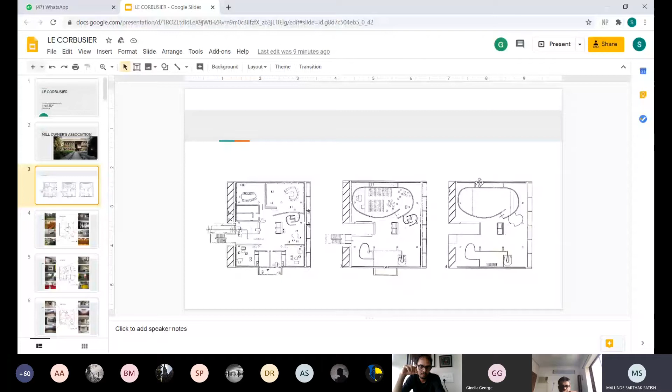Like in the third plan, you see this is the auditorium, and I'll show you the pictures ahead. So this is the ground floor plan. The ground floor is lifted on stilts with very minimal spaces, and the glass on the first floor and the rest above.

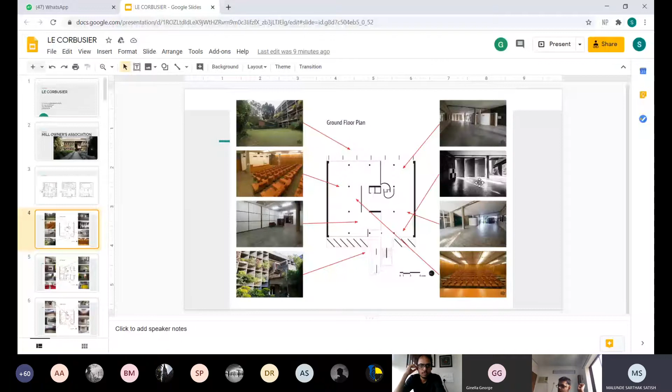Yeah, so these are the photos from when it was built, early on, the photos that were clicked at that time.

So this is the door at the second floor where this ramp takes you and then the staircase takes you. What I like here is that this door is acting, for me, as a perfect threshold between inside and outside. The way he has played with the solid forms and the voids here, I really like it.

And he usually creates such huge openings like the door here. He usually has square doors which are mainly hand painted by himself.

So the staircases at the Millowners are very extraordinary to me because they are a combination of aesthetics and engineering. In the staircase there is the beam which is coming from the column, and it is taking the load, in both the staircases in the center and the left side.

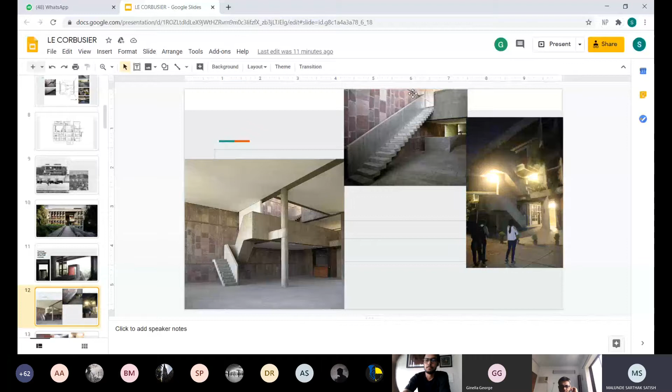The handrail is also very appropriately arranged, and in fact in the central staircase it is the beam which is acting as a handrail, which is quite a good combination of aesthetics and engineering. And this third photo is from one of our seniors who had sneaked into Millowners and took these photos for us.

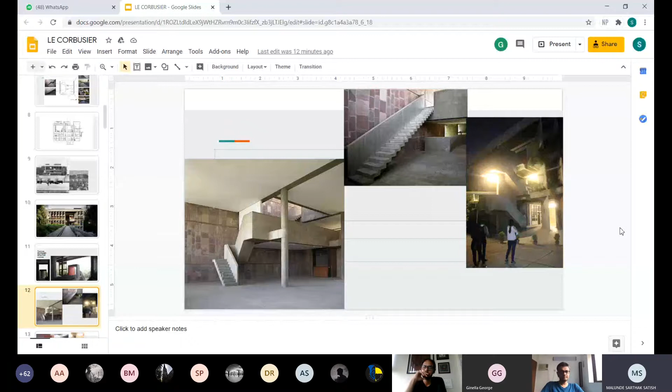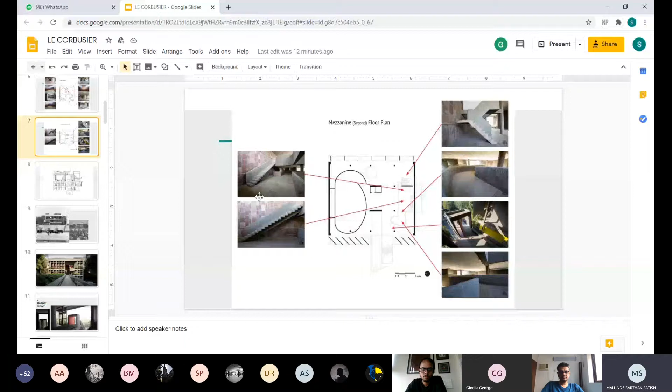And this is the auditorium which I talked about in this slide. These curved walls engulf the space, and the walls have a wooden finish, and it's a very good space.

These are some of the photos from Millowners where you can see the columns from the free plan, and these he called brise-soleils, which were a modern kind of chajjas which prevented light from entering the building, but also acted as frames for the viewers. And there were also places where you could place vegetation.

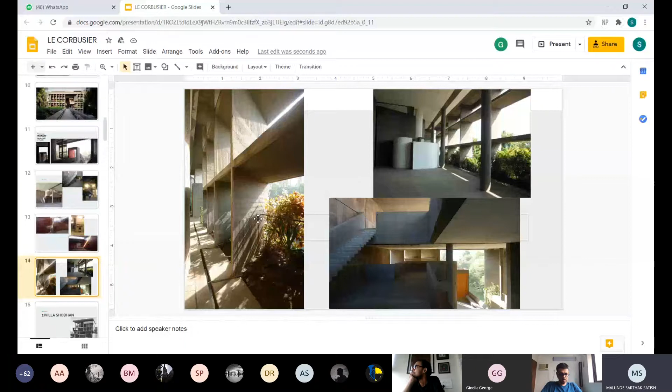Yeah, and this is what he used in many of his buildings in India. This was one of his concepts. And yeah, so now it's Villa Shodhan.

Gargi, would you like to take it over from here, or should I show the... No, Ronchamp first and then? Yeah, yeah, works like that also. Okay, cool.

Okay, so this is Ronchamp in France. This is a chapel which is located on the top of a hill. This is a conceptual drawing of Le Corbusier, and he wanted to create a space which would make one feel inner joy, have peace, and where one can pray.

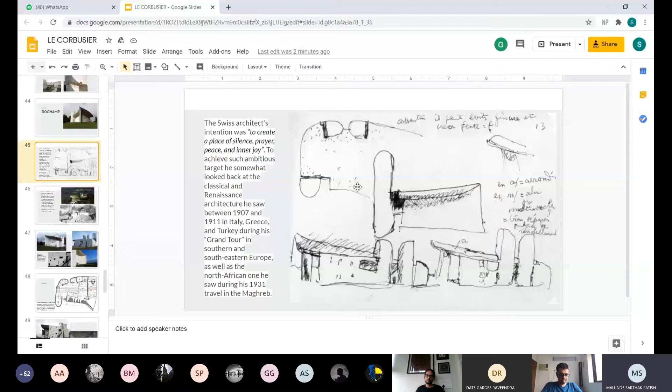And this is a sketch of Le Corbusier from when he was on his grand tour, exploring and studying architecture from different realms of history. And so this chapel is also considered one of the monumental structures sitting on top of a hill, just like the Parthenon and Acropolis.

So the materiality and the texture used in this structure is very different from the rest of his projects. Here he has used a much more organic form, and the texture is sprayed concrete over the walls. This way of materiality helps the structure to be one with the landscape. Like the way the light falls on the edge.

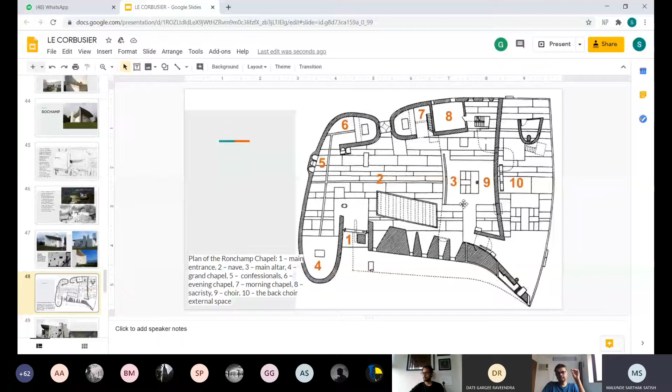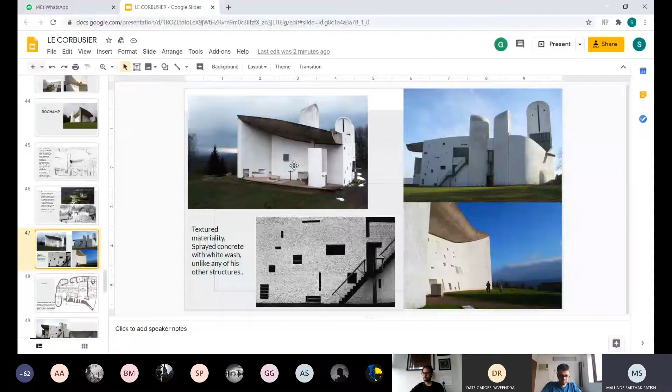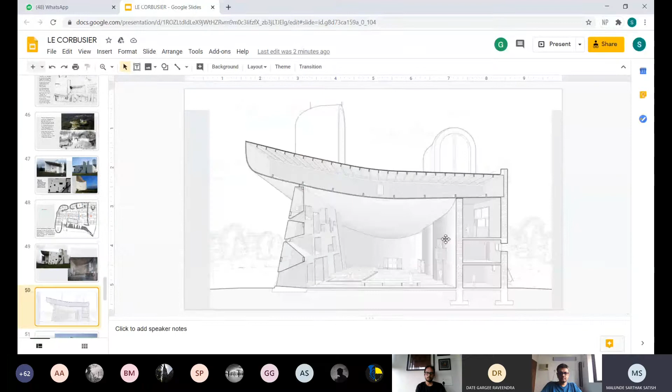Yeah, so the roof of Ronchamp is very extraordinary. Can you see the white... the roof seems floating because it is not coming in contact with the heavy walls underneath. There is a thin sliver line which is seen from the inside, and this is the section for Ronchamp. The roof is fully reinforced concrete, 6 centimeters thick, and so the roof is

often conceptualized; there are many theories behind it. Some say that it looks like a hand, some say it looks like a cloud. But what I interestingly read about it is that Le Corbusier was inspired by an empty crab shell he found on Long Island.

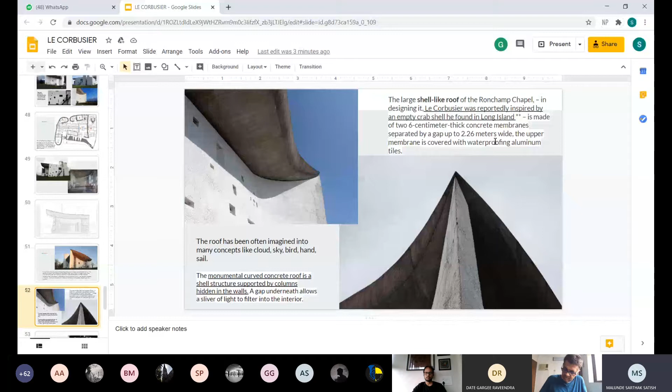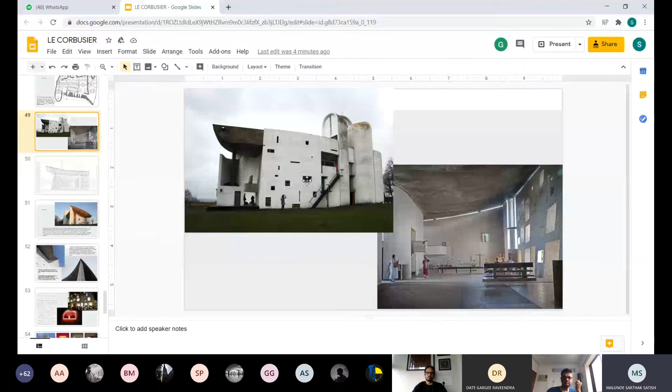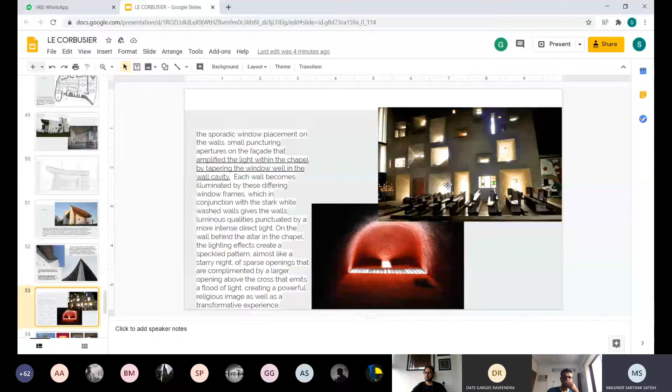So yeah, and these are the fenestrations which are there in the chapel. If you see these fenestrations, they look very small from the outside, but they are very cleverly crafted in such a way that there is maximum light inside, and the glass present here is hand painted by Le Corbusier. And yeah, these are some of the glasses, and the details I really liked.

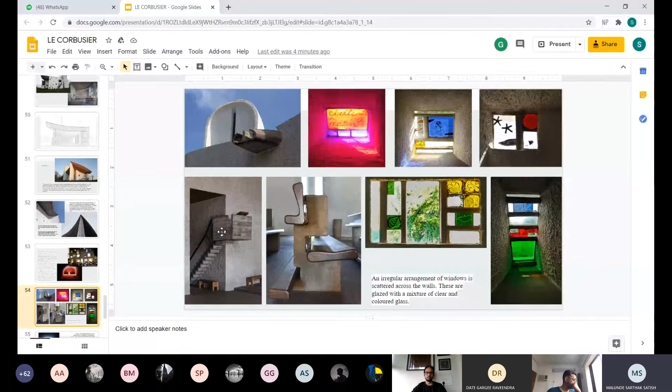So even the benches in the chapel are a combination of wood and concrete, which are designed very cleverly, and the staircases as usual are of raw concrete. Yeah, this is the main chapel.

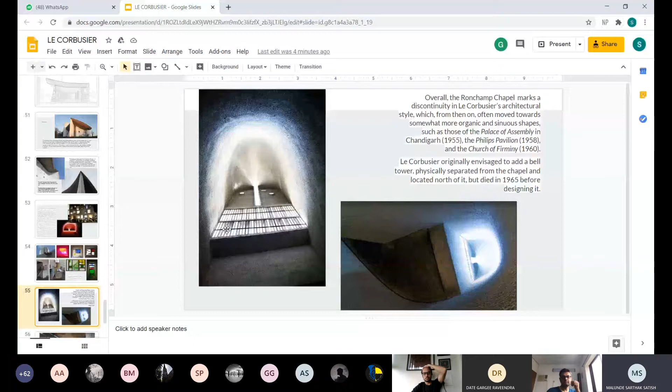I don't know, they wanted to create something which would feel peaceful, but many things are happening in this chapel. At least from the photos, it looks like many things are going on, and I don't know if one would feel at peace. I guess we can't say anything unless we go, but at least from the photos, I feel that there are many things going on at a time. There is a fantastic composition of all these things, but I don't know if it is successful in creating that peaceful ambience in the interiors. Yeah, I'm done here.

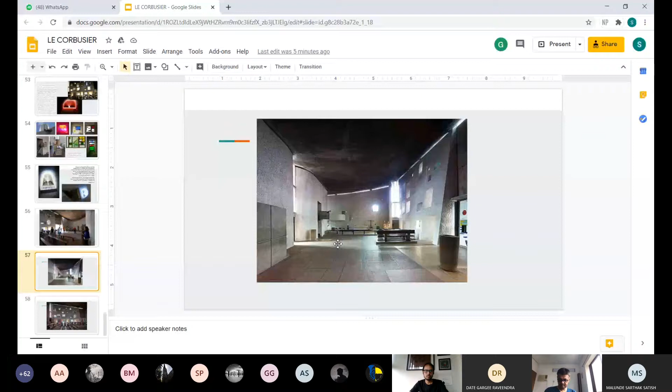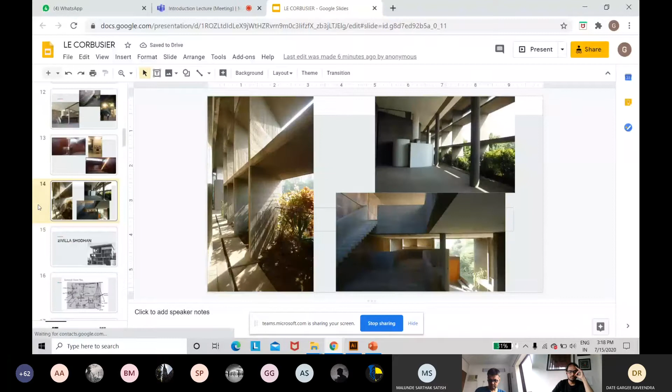Sarthak, yeah, will Gargee, can you take over? Stop? Yeah. Oh, okay, okay. Okay. Yes. Yeah, can you see my screen? Hello. Yes, yes, we can see.

Yeah, so talking about Villa Shodhan, it is located in Ahmedabad, Gujarat. It was designed for a warmer climate and an extroverted client. Villa Shodhan is a story of a roof parasol. A roof parasol is basically a shading device used in a hot and dry climate where shade is essential during the daytime and the outdoors is pleasant in the evening. So the house is composed to kinetically balance the solids with the voids, a dynamic sculpture that keeps changing with the position of the sun through mutual shading.

Villa Shodhan is also known as an update of Villa Savoye. In Villa Shodhan, one could notice that it comprises several themes of Le Corbusier's earlier work, and it's a synthesis of his previous ideas, just played at a higher pitch. So, looking at the ground floor plan, wait, 1 second.

Yeah. So basically, you enter the Shodhan Villa through the northwest entry. You enter from here, then you have a blank wall here, and then there is a void here which takes you in. This is a porch which is cantilevered. As you enter, it takes you into the space which is defined by walls and freestanding ramps.

This ramp, which is transversely placed, is placed in such a way that the living room and the dining room get their privacy; that's the reason for placing the ramp exactly here. And the bottleneck created here at the confluence of horizontal and vertical circulation, at the commencement of the ramp, further marks the threshold; it acts as a threshold for the living room and the dining room.

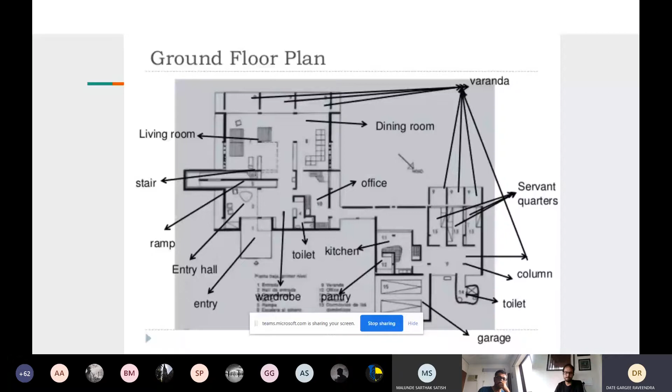And the living and the dining rooms, they also extend naturally into the gardens which are there. So the ground floor is double heighted. And then when you come to the second floor, it is basically simple with just bedrooms and open terraces.

The third floor has living spaces composed with a variety of open and closed spaces. There's a ramp which takes you from the ground floor to the third floor, and meets the stairway to the top of the main living room. So the upper floors, that is the second and the third floor, generally contain only sleeping areas, and the ramp actually acts as a device for smooth transition and gradual climb.

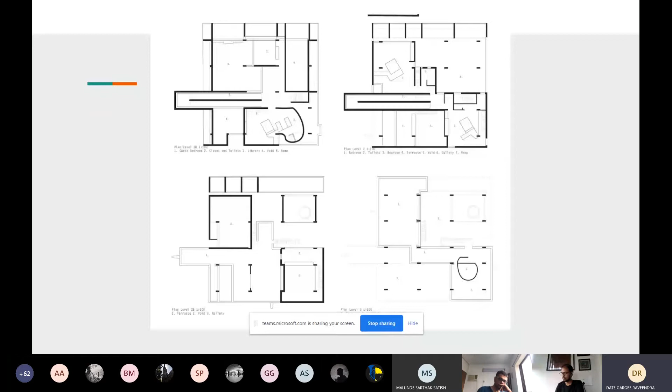So in this section, basically what you could say is, you have these ramps, then you have staircases at different levels. Through this one could also notice that there is an interplay of closed and semi-closed spaces, low and high volumes, spatial variety, and visual continuity.

So this roof which you can see here, that is the roof parasol. The roof parasol is supported by 4 columns that run from the ground floor to the top of the roof. That is a speciality of Villa Shodhan. Basically, a parasol means an umbrella which protects you from the sun.

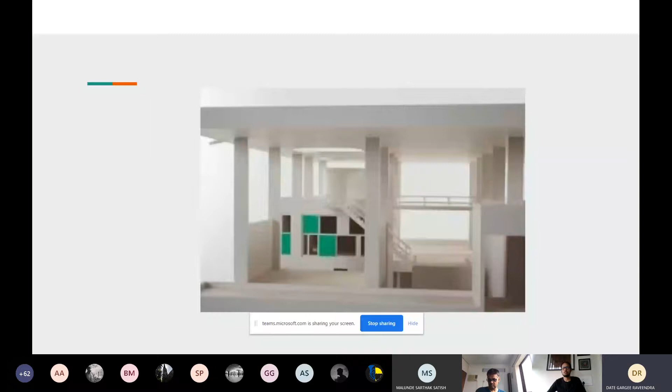Then talking about the brise-soleil, it is basically a screen which is usually louvred, placed outside the main building to protect the building and the windows from the sunlight. So Villa Shodhan emerged as an update of the Villa Savoye, and what one could see through these were the parasol roof and the connectivity, that is the ramps and the staircases,

which can be seen from the exterior through these brise-soleils. The brise-soleils are present on the southwest, so that they provide the much needed shade from the haze and heat of the sun, while keeping it transparent for the breeze, as well as giving you views of the outdoors.

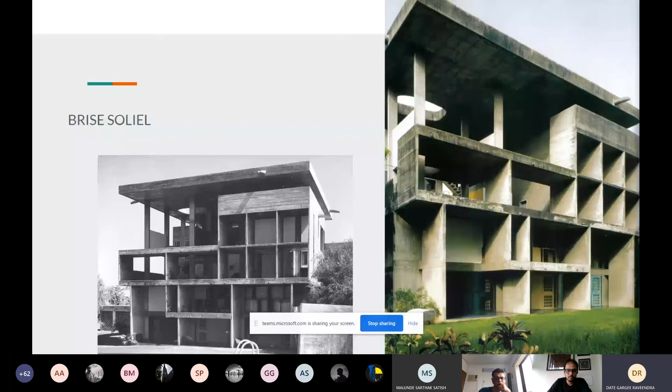So here Corbusier also tried to incorporate elements from the local architecture. The living room of the ground floor is double storied over here, and that was a characteristic which he found present in the houses he looked around. And also he lets nature into the house, which was again a characteristic he found to be common there.

One more thing which was very prominent in Villa Shodhan was the brightness of colors, used against the neutral, concrete, monotonous backdrop. So basically, he used colored doors and window frames. And in Villa Shodhan you have a freestanding roof, but such a bulky mass is anchored to the ground.

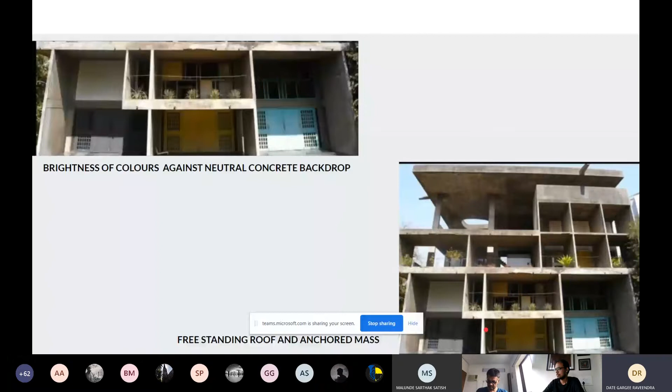And also, Villa Shodhan is based on Corbusier's 5 principles: you have these horizontal windows over here, then you have the free floor plans as in many of his buildings, then you have these roof gardens which you can see here, then you have these pilotis, which were again a major thing of Corbusier's architecture, and then you can see the free facade over here.

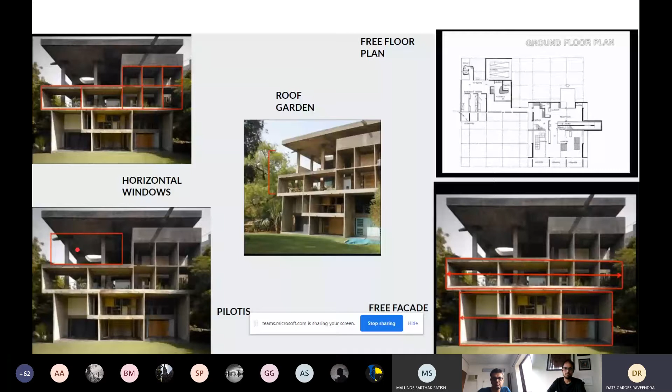So talking about the next structure, that is La Tourette. La Tourette is located in France. It is Corb's final building completed in Europe and is also thought by many to be his most unique program. It was built to be a self-contained world for a community of silent monks.

Father Couturier told him that the building had to show poverty, which was one of the main principles of the Dominican order, and it had to accommodate the unique and specific study lifestyle of monks. So it had to be an appropriate place where the monks could study, with a comfortable temperature and silence. The site was specifically chosen, as Corbusier was drawn towards the steeply sloping banks with powerful views.

The structure is basically RCC with undulating glass. The monastery is composed of 4 rectangular structures, with one which acts as a church, and the other 3 housing the cells for the monks, the libraries, the refectory, a hall, and such things. So basically, when you look from the road, you can only see these cells, and this is the church.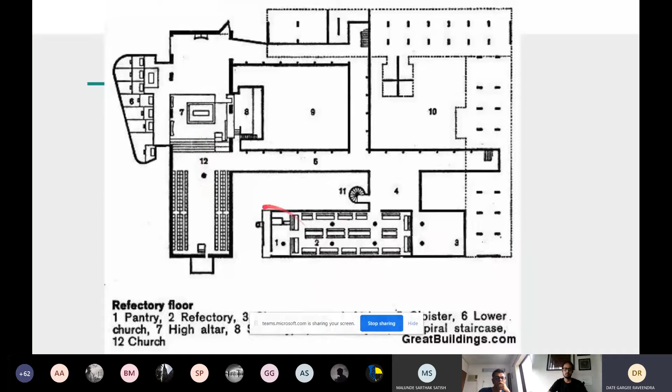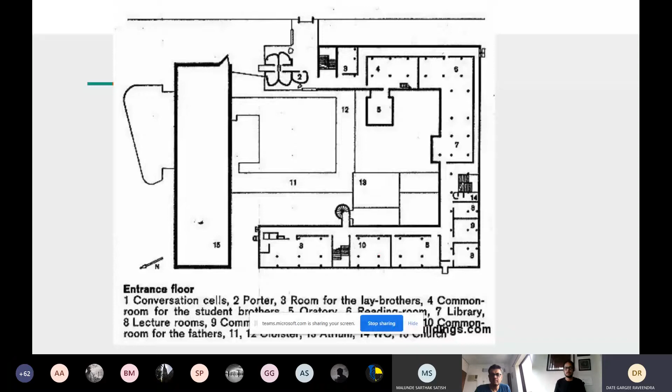When you come to the next level, this is again the church which is continued, but here you have rooms, libraries and everything. The second contains public entrances with reception rooms, porter's lodge, study rooms, library, oratory and common rooms. The third floor is completely dedicated to the cells for the monks.

Then the building had to be a chapel, a residence and a place of learning for Dominican friars. The monastery, when you look here, is grouped as a U-shaped mass around a central courtyard.

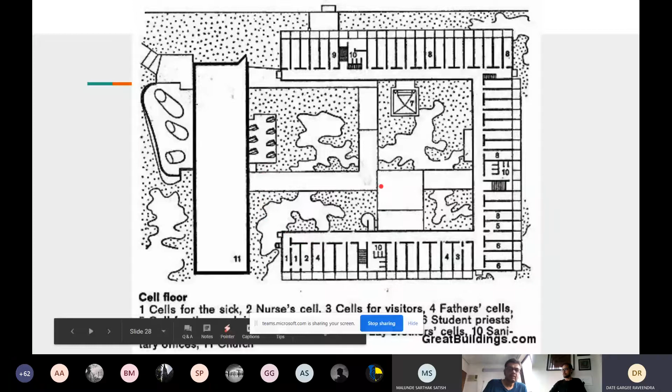The location of La Tourette was really beautiful. Since it was open to the landscape, Corbusier wanted to make the most use of natural light, so he thought common cloisters wouldn't be necessary there. This was supposed to be the church, and this was supposed to be the monastery, the living cells, the library and everything. The church of La Tourette was open to everyone coming there who had belief or faith.

So to mark the difference between the monastery and the church, he created a void, he pulled it away, and hence a void was created up here. In the real structure this void is also kept open. So this is the void which you see here. This is the church, and then you have a void over here to mark the difference.

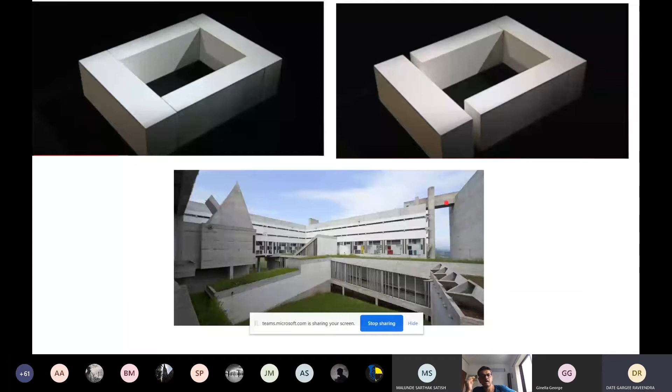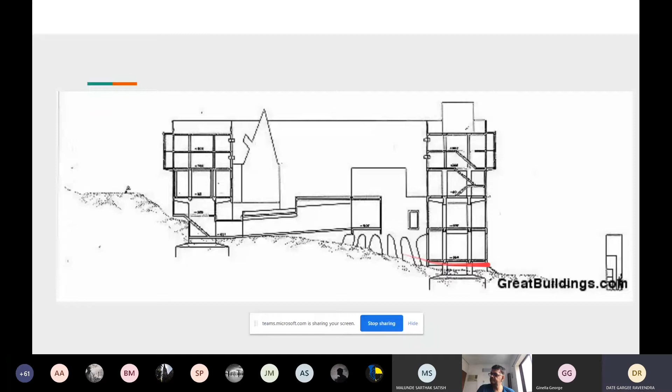The next thing is the section. The section is here, and from this road, the church and these cells are visible. But as the slope goes down, you can see the pilotis over here, and the floors basically increase to the other end of the slope.

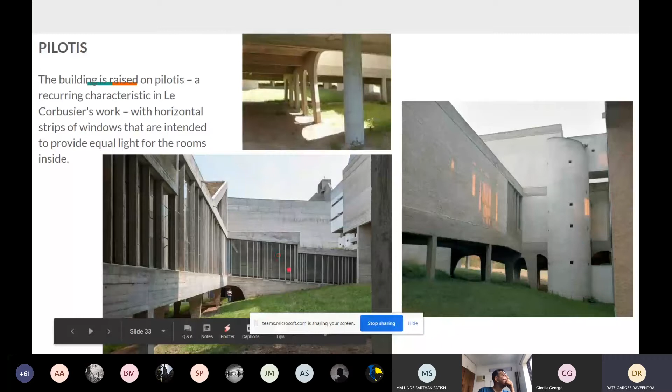Talking about the pilotis, which was again a main feature of Corbusier's architecture, he had pilotis to raise the structure up, and horizontal windows to provide equal light for all the rooms inside. Then the corridors were covered. The ramps and the corridors were covered by the flat roof up here, and the flat roof was covered by green space.

When you look here, these are the cells, and these are the facades. These are the interiors of the library and everything. Here you see there's only a horizontal slit, while here you can see glass and concrete panels. This difference is because he believed there should be different facades for different functions. So the interior facades of the library, refectory and lecture halls have glass and concrete, known as the Mondrian squares.

Then talking about the refectory and the chapter, he broke with the typical idea of the monastery and opened the large rooms. He wanted to let the view into the structure, so that the contemplation of nature could be a source of meditation. Here you can see he used concrete mullions and glass panes.

Then talking about the cells, there are 100 cells present for the monks.

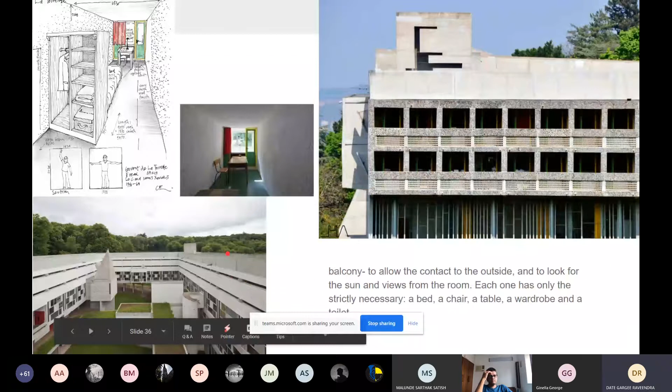And these portions which basically protrude out were known as the sugar lumps. These sugar lumps were the structural support which was provided. But to make it more interesting, he blocked it up to here with concrete blocks, and then only this portion was kept open so that the passage gets lit by the sunlight.

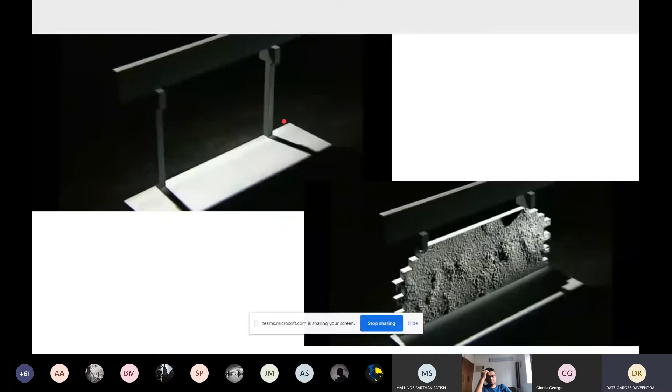So now talking about the church of La Tourette. The church was basically a concrete box without any openings. The openings were not visible from the outside, but they were visible from the inside. This vertical slit was designed so that the light of the sun could enter, and this horizontal slit, which you can see, was designed so that the church would be lit by the light of the setting sun.

While most churches have rose windows or glass windows, none of them is present in La Tourette. Basically, he used horizontal vents, which were painted in bright colors. These are the horizontal vents which he used to let the light in.

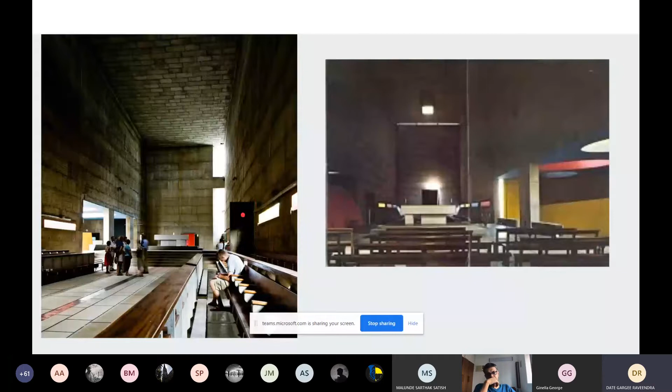So here, this is the main church, and on this side of the church there is an ear-shaped crypt. So two buildings adjoin each side of the main structure on the outside of the quadrilateral. This is a crypt which is ear-shaped and which has these cannon mouths to let the light in. You can see these are the cannon mouths.

So this ear-like crypt has these cannon mouths, and this is the sacristy, which had machine-gun-like projections. It had seven geometric machine-gun-like projections to let the light in. So these machine guns would let the light in. A crypt is basically a chamber which contains coffins or religious relics, and a sacristy is a room where the priest prepares for his service.

So basically the church had a traditional cross shape due to the presence of the crypt on one side and the sacristy on the other. So this was the sacristy. And this was basically the light: light could come in through here, and through these things which are here.

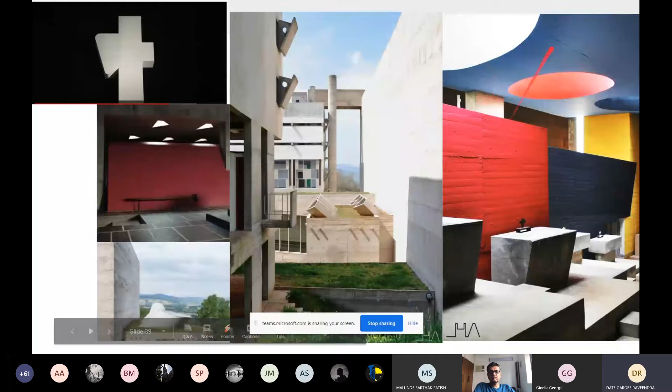So talking about the horizontal vents which he kept here, he painted them with bright colors so that light could come in. There's no glass here, only these open things. And he placed them in such a way that when the monks sit to read any religious script, light could fall in and it could be properly read. It was positioned in such a way.

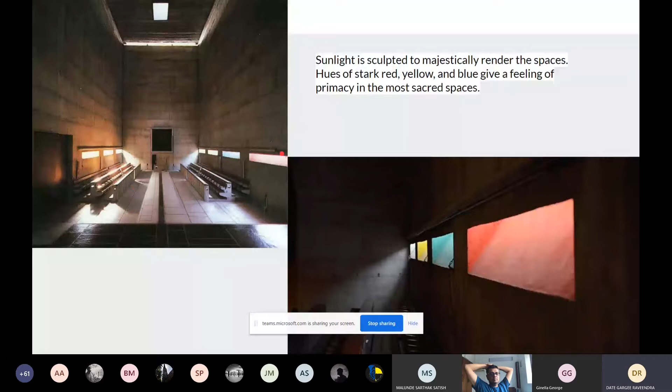So talking next about the roof of the entire structure. It was a place where one could walk and meditate under the sky, and it was surrounded entirely by a wall which is up to 1.8 meters in height. So looking at the next thing, basically this is a structure.

So here it is, and on the upper floor there are the cells, and below it is the library and everything. So what one would expect is that this would be an open courtyard, but it was not. It's actually not open. It has these passages of cloisters, which he calls conduits to regulate the main flow through the monastery.

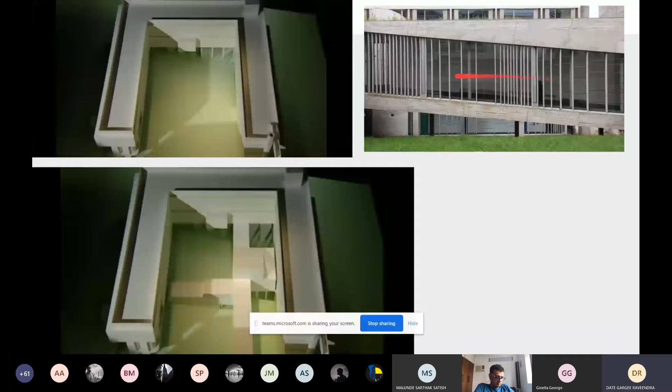So these conduits are basically to regulate the flow of people so that the monastery does not become crowded. These conduits appear like this: ramps and everything so that people could walk through there. So when you look at La Tourette from the exterior, it seems to be one thing. It appears to be a cube whose facades align variations of a single theme. It appears very geometric from the exterior, basically one thing which follows the same

theme. But when you come into the interior, the courtyard presents enigmatic and disturbing scenes. It becomes a juxtaposition of simple volumes. This is the atrium, which has a sloping roof. Then these are the sugar lumps of the cells. Then this is the oratory, a cube-shaped oratory with a pyramidal roof. And then this is the cloister, and this is the machine guns.

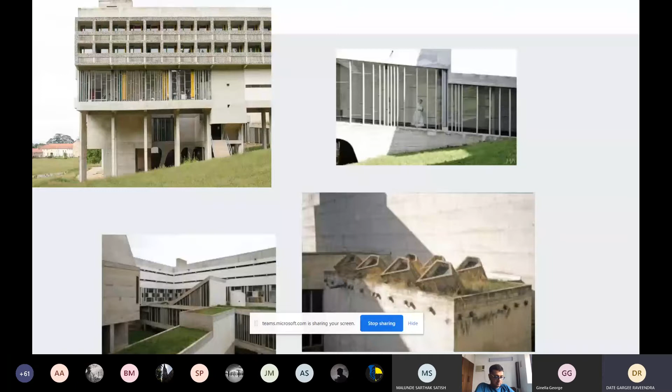So personally, I feel that from the exterior it appears to be a very simple, plain thing, but when one comes into the interior, there are so many geometric forms inside, creating a different kind of composition. That's it.

Hello. My microphone was muted, sorry. Is there anyone else, or was that it for today? Yeah, me and Sarthak only had this much. Thank you. Well, thanks for that.

It's an interesting way in which both of you chose to present, and it's something for us to start thinking about. Both of you looked at the building directly as an object and analyzed it for its various elements. It's interesting that when we talk about theory of design, we tend to talk about the building as a separate entity. But when we theorize it, we are in some way trying to place it within some larger frame, right?

Both of you presented the building very well, but it may be interesting to think about where Corbusier's formal ideas come from. Why is he doing what he's doing? Let's just talk about Ronchamp. Ronchamp was a very strange chapel, right? Sarthak said he didn't know how it's supposed to make people feel religious. Why do you think he designed the building the way he did? Any ideas? I'm trying to find the window here. Any clues? Is it related to the World War in any sense?

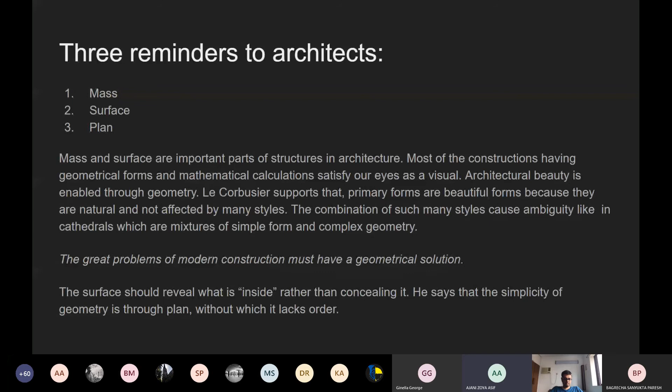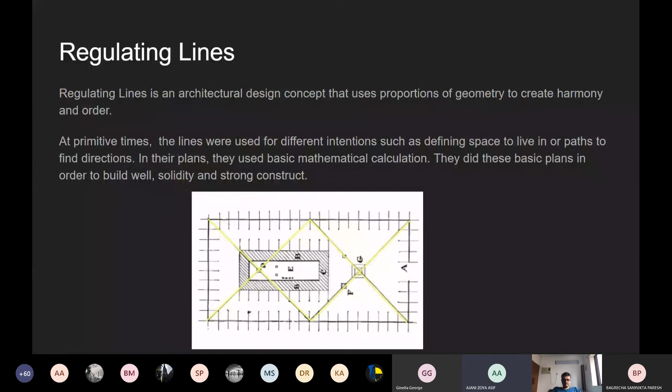Regulating lines. This is an architectural design concept that uses proportions of geometry to create harmony and order. In the primitive times, the lines were used for different intentions, such as defining space to live in, or paths to find directions. In their plans, they used basic mathematical calculation. They did these basic plans in order to build solid and strong constructions. Using regulating lines in design helps combine artistic and mathematical thoughts to create satisfaction, because these lines cannot be used without measurement and calculations.

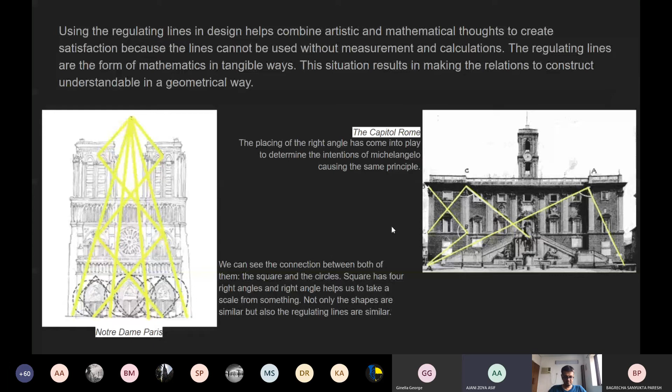In his chapter, Eyes That Do Not See, he talks about simplicity. He uses the term primitive man to show how complicated architecture has become, and that going backwards was the only way to move forward. According to him, the architects who are not realizing the new aesthetic ideal and the pure forms being produced can't see the simplicity of things, and hence blindly continue to produce over-decorated buildings.

Yukta. Yeah. So, in this essay, Architecture, Corbusier praises Greek and Roman architecture a lot because of the simple geometric forms in them. So, he feels that these structures are pure and simple, and that makes it timeless. But he also says that there's a lesson to be learned from Rome.

So according to Corbusier, a motor car was a true symbol of modernity. So he makes a comparison between the Parthenon and a car. He compared a 21 Delage to the Parthenon, where he said that the 21 Delage was a classic car, and people liked it, but no one wants to buy it now, because now that's a car with outdated technology. So he said that people eventually need to move on, and they do.